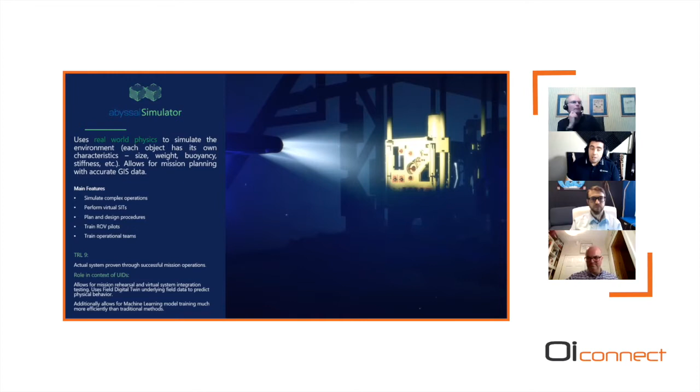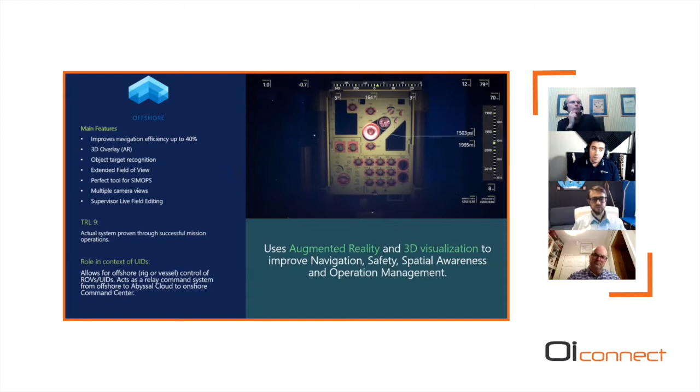The result from a simulation is a plan, and that plan is then executed. The execution is essentially we have a kit that we install in the ROV control room near or on the vessel, or on an unmanned surface vessel equipped with an ROV. What it does is allow better data management locally offshore. If there's a pilot there, we also do augmented reality to help the pilot navigate better in low visibility conditions.

This is an example of that augmented reality, because we have access to that 3D environment and the live telemetry from the ROV, we can do things like this. This is just a couple of pictures on the system in use.

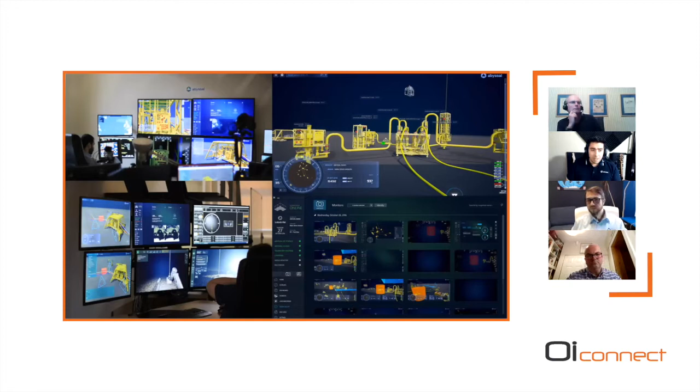Now that while we're performing those operations, those jobs offshore, and because we're sending that information to the cloud, our capability of creating command centers on the fly is very straightforward for us to do. This is an example of what we've done, and Al was also involved in this. We were tasked with the monitoring of an operation where an unmanned surface vessel equipped with an ROV was doing an operation. So essentially what we've done, we've set up a command center in Sunbury in their headquarters for BP. And then we use the cloud to disseminate that information live to Baku and Houston, so that people could see the operation in 3D live.

So, but let's dive into the process and contextualization. The purpose of this presentation is how can we accelerate the analysis of inspection videos by subject matter experts. And this is all done by automatically detecting those subsea entities and anomalies, the exact job that the subject matter experts do.

And this was our motivation. The manual or human analysis is always error prone, obviously time consuming, and you have to parallelize with human resources.

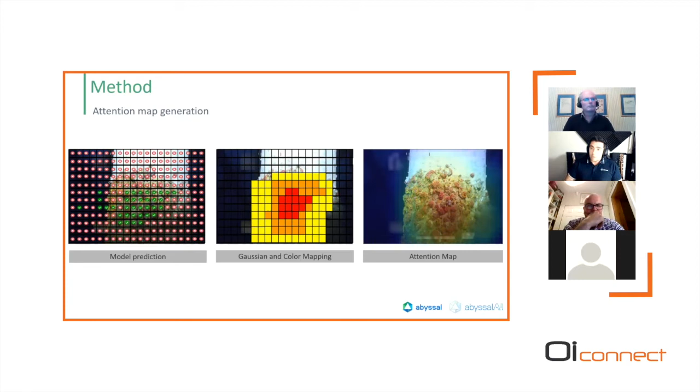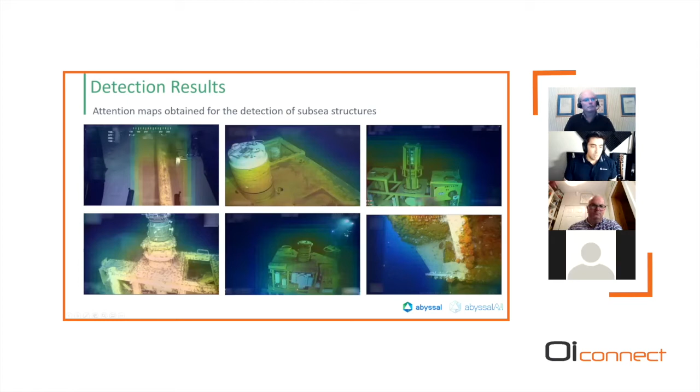Let's look at detection results on this kind of imagery. These are a few of the results from subsea entities to pipelines, marine growth in several different situations, but also to detect other things. It's specifically useful to detect the ROV when we're talking about imagery, because we can remove the manipulator from a model that we're trying not to have something in front of us.

If we want to analyze only the image, we can take out the manipulator in front of the camera. But let's say that we now have a probability cloud. Instead of having a color grading, we can make it binary—either there is or isn't marine growth in that area. We can segment and create segmentation masks, meaning we know in the imagery where that structure is positively or negatively, and this will make sense when we move to use cases.

But the overall result of this weakly supervised deep learning model is that not only is annotation faster—100 times faster to annotate data like this—the actual model itself is also 2 times faster than a traditional deep learning method, which means this could be the difference between not being able to do it in real time and being able to do it in real time.

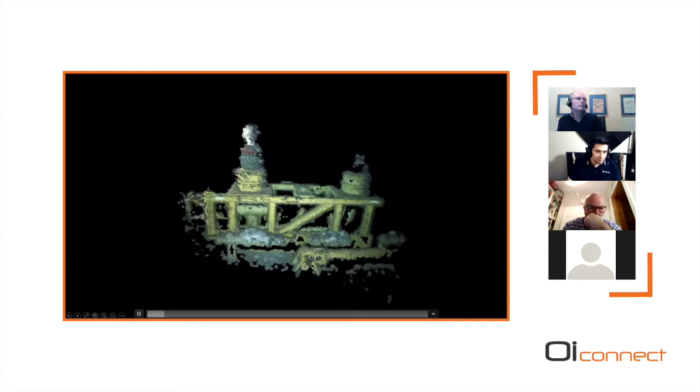What you see on screen is actually 2 different years of the same PLET, but because there was a pipeline walking issue, it moved throughout those years. So these are 2 point clouds, one from each year, of the same PLET head. We were able to achieve an accuracy of half an inch in the volumetric reconstruction, and the result is something like this.

But this is just a result, let's see it in a real use case. This is what we've done for a client, and what we had was only this real footage. What we were able to do with this footage is to volumetrically reconstruct it into a point cloud. So essentially, this is the point cloud from this imagery, and then we compare it with the CAD schematic.

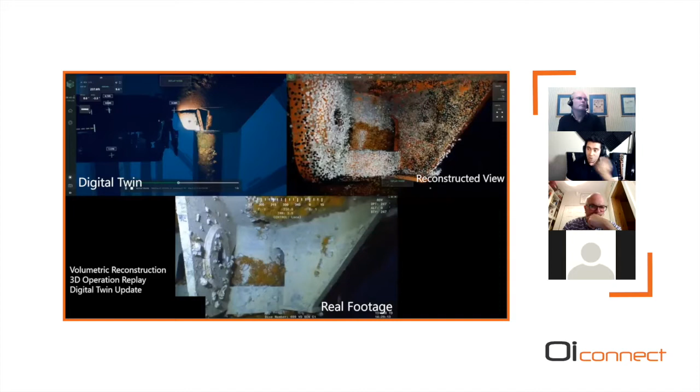The difference between the point cloud and the CAD schematic is actually the marine growth, but now in a volumetric response. So now we automatically can find out the thickness of the marine growth purely based on video and CAD schematics. We were also able to estimate the position of the ROV, essentially reconstructing the operation and movement of the ROV, but also to estimate the camera movement, which is essential to do this.

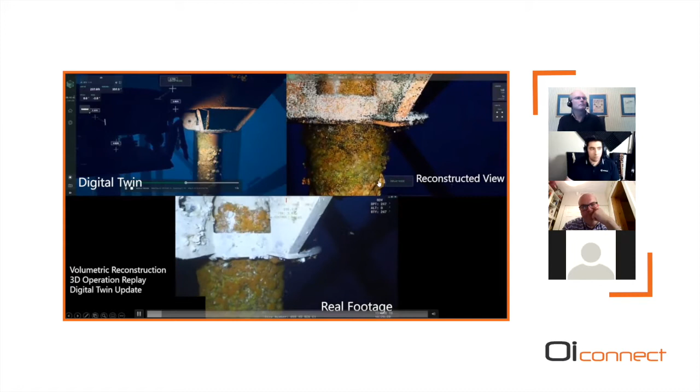The way we do this is in the Abyssal Cloud. If you want to do that to your videos, this is the product that we use.

My last slide is on what we're developing next, and that's Subsea.ai, which is the capability for you as a user to create your own machine learning models based on our techniques. We've developed our own techniques of developing machine learning models, and we allow you to do exactly that with your own data to fix your own specific problems.

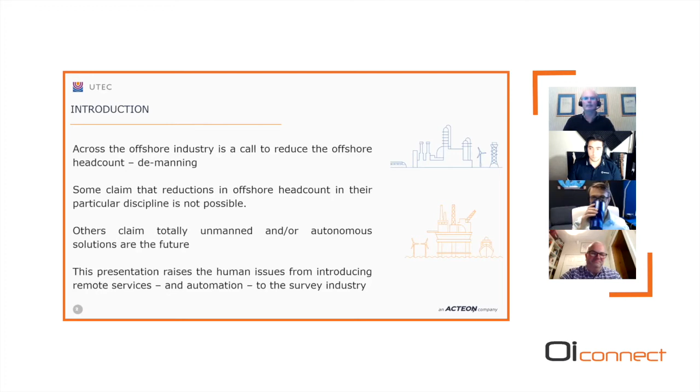And the arguments are obvious: reduced offshore headcount, fewer man movements, you can bring an expert to bear onto many spreads rather than needing an expert on each spread, and all of that's going to reduce costs. So what's not to like? Well, that's what we're going to discuss.

So by removing people from the work site, one of the key things we lose is what I call situational awareness. Now this is peripheral knowledge beyond the sensor displays. It's not about giving the remote surveyor more cameras so they can see what's happening outside. It's the fact that if you move an online surveyor to a remote location, he's no longer in the mess room hearing what's gone on elsewhere or on a previous shift.

So he just misses out on the accidental conversation. That's a big problem with remote services.

Also, if we're taking people, demanning the offshore spreads and putting people in remote control centers, operating automated software, we're dehumanizing the profession. You know, I made some of the best friends of my life working with people offshore, where you're on a big tin can for a couple of months and you get to know people.

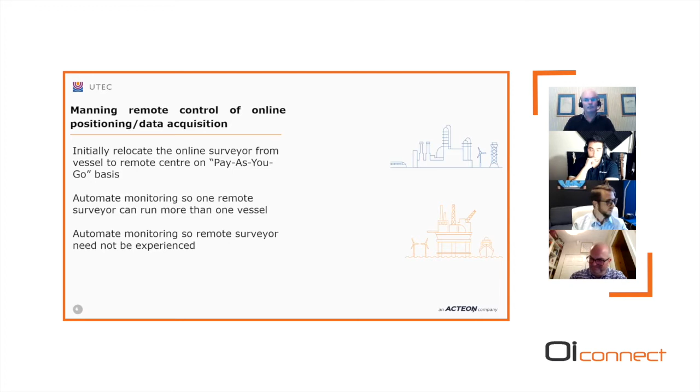Right, so then, never mind the online surveyor, let's look at the role of the experts. Everyone talks about, oh yes, remote services, your team of onshore experts support many jobs. And you go, that's much more efficient than having an expert on each job, and also addresses the skills shortage, where all these experts come from.

You go out on a metrology job and you haven't got the best metrology man because he's busy on another job. So now we can bring the best metrology man to every metrology, right? Because he's sitting onshore.

So what happens to all these other lesser experts that you're no longer needed? What are they going to do? If they're not getting the day's work, then they've got to retrain as something else in the survey industry, or just leave. And then you can apply the same to inspection coordinators.

That one coordinator could supervise multiple inspection engineers. And same with party chief, offshore managers, client reps. Do they need to be on the boat? Can they just be sent all the screens and data so that they can QC and monitor from onshore?

And again, you don't need a remote client rep per vessel. One client rep remotely can QC multiple vessels. So fewer people - you're decreasing the pool of personnel in the industry, which is decreasing the experience and expertise that's available.

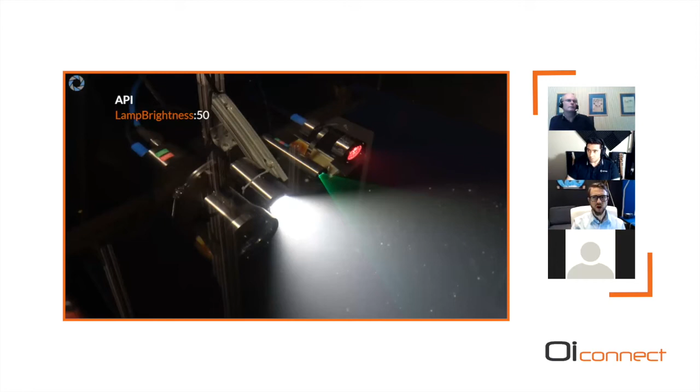SubC cameras can control white LEDs, far red, and other colors of LEDs, as well as different types of lasers. The camera supplies power and strobes the LED in sync with the sensor exposure time, which reduces equipment and interface complexity. Here's their API call for enable strobe, and SubC has a number of plug and play options for lasers.

There are many lens options for different machine vision applications, including line, grid, and parallel points. So a laser brightness of 100 would turn on your laser at 100%.

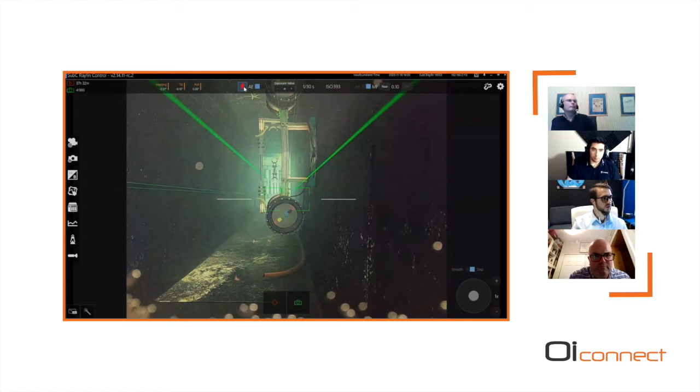Now I'll give a real-time demonstration of a camera with scripting capability. You can see the camera running here. Along the top, we have our heading, tilt, and roll. You can also have a depth sensor integrated, strobe control to turn on and off your strobe, and exposure control.

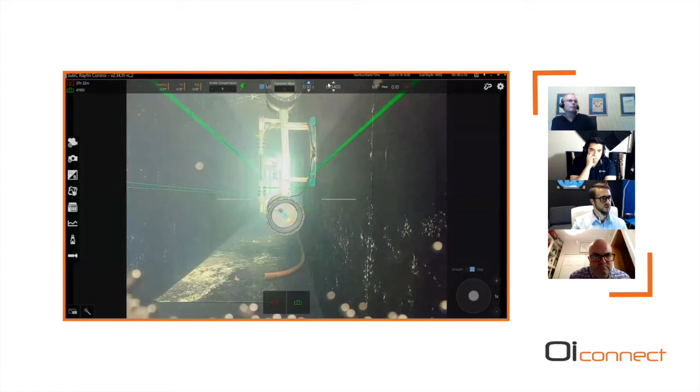So you can change your exposure bias. For auto exposure, you can also set it to manual exposure and adjust your ISO and your shutter speed. You can also control your focus from near to far, and everything can be full auto or full manual.

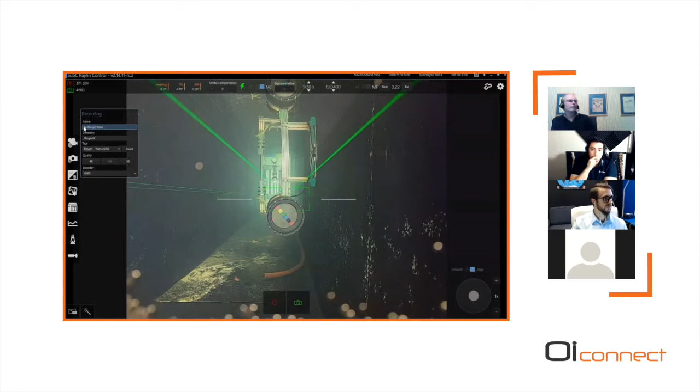Along the left, we've got some recording settings, so you can have different site names. So site 1, for example, and you can have a project name or a folder or directory name, so project 2. We can also insert some tags, just simple tagging structures to make things a little easier. You can get down to milliseconds with tags, and you can also have custom tagging.

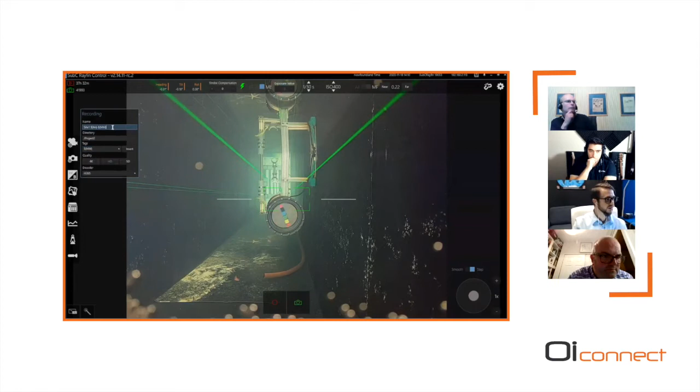Quality can be recorded from 4K to SD, and I'll go 4K, and we can also record H.265, which is a new codec over the last number of years. H.265 is about double the quality for the equivalent bit rate. So if you're recording at 100 megabits per second in 4K or HD with H.265, you'll get better quality.

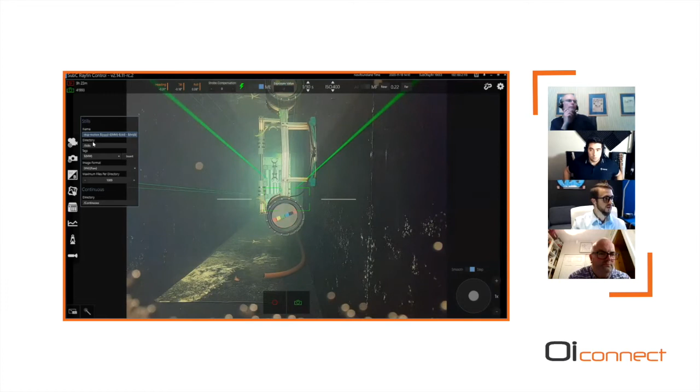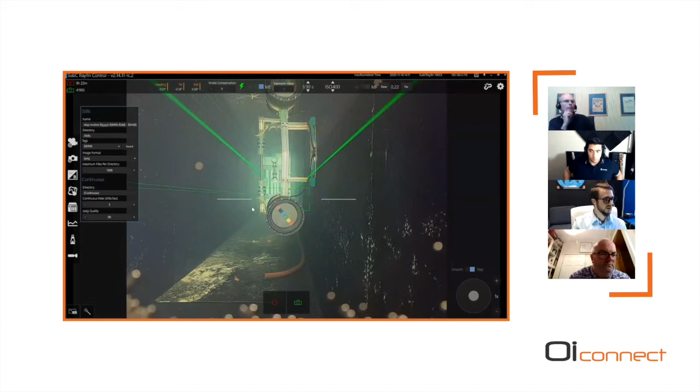Similar with digital stills, we have a folder naming convention. We also have a file naming convention that mirrors the recording. You can change from RAW to JPEG, and you can also take digital stills continuously. So if I set it to 2 Hertz and hold down the button, you can take digital stills rapidly over a wide area and use those digital stills for photogrammetry or other applications.

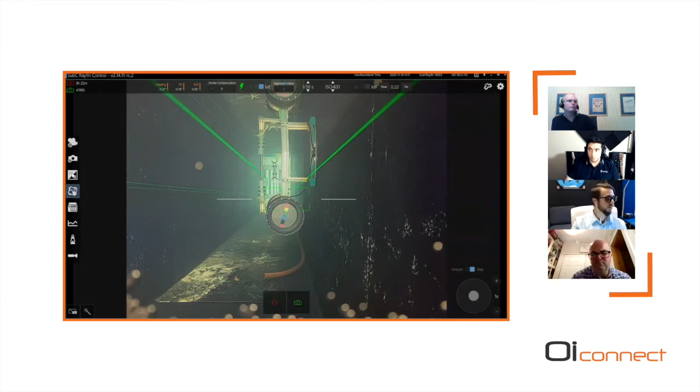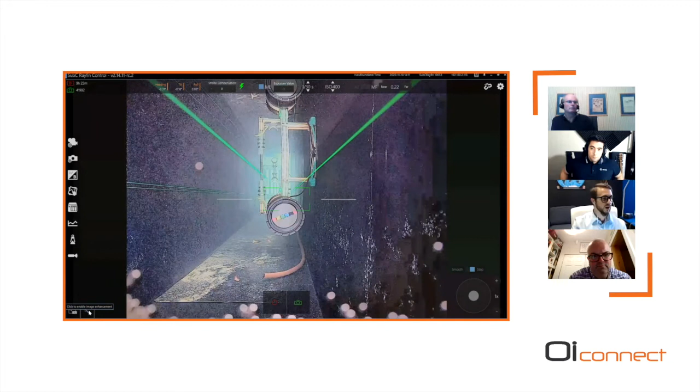We can change your white balance as well, so we can have a shallow water setting. Say if you were in shallow water and there was a lot of green, you could reduce that and adjust it for your environment to get a better image. Similar to that theme, there's an image enhancement built in if you really can't see anything, for really murky environments. This is a tool so that you can at least see something to get the job done.

You can also view our images and data in real time, and other computers and processing systems can access this data over Ethernet from the camera in real time. You can have it on an observatory or an AUV or something with low bandwidth connection for video, so you don't need your live 4K feed back. You can record to the camera or take digital stills, download those images and video in real time, process them, and get very creative with your workflows to improve efficiency.

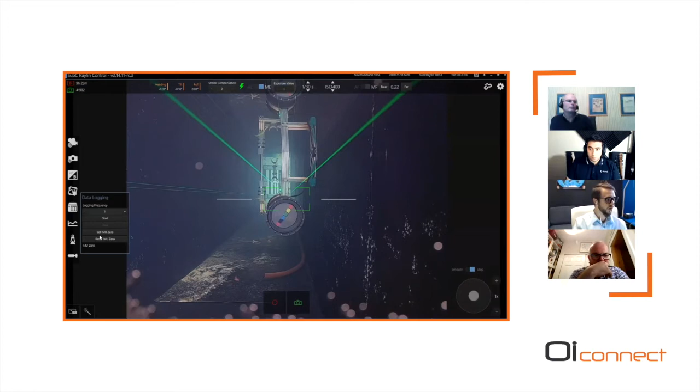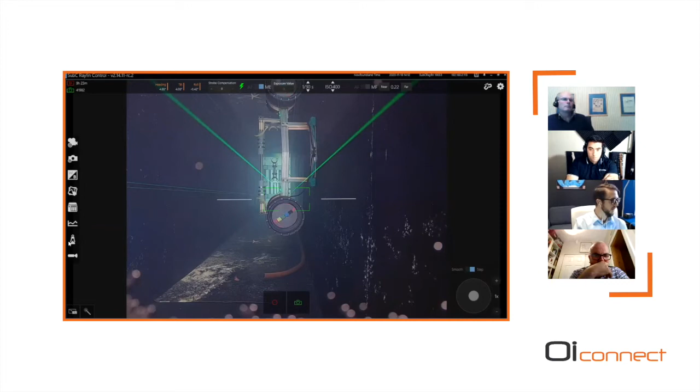NAS storage as well, so you can store to an external NAS on the network, somewhere on board the vessel. And data logging, so it's enabled right now. We can change our logging frequency, in Hertz, and we can start and stop. We can also reset the IMU or set a new zero for the IMU, that's your heading, tilt, and roll. So I'm going to reset it, and you can control your attached lamps and lasers and other devices that you have connected.

On the right-hand side in the advanced settings is where we're going to be focusing, just some quick communication connections, settings for bit rates of the live video.

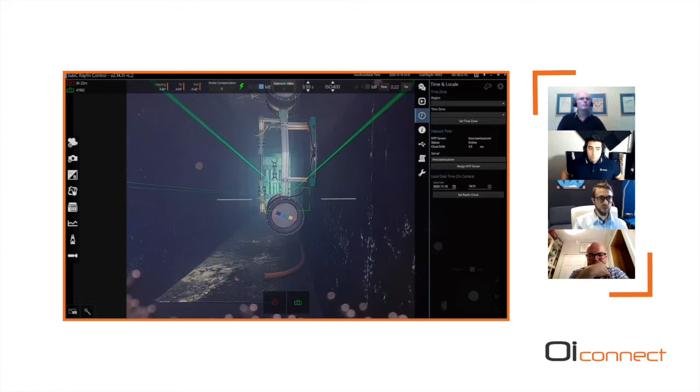Here it's important to understand your time and locale settings. Time is really important for data logging. So you've got your region, your time zone. It defaults to UTC, and you can also have network time, which would sync to an online cloud NTP server, one on board a vessel, or one even in the system, say in the case of an AUV. And you've got a local date and time, which the camera will default to if you lose your network time connection.

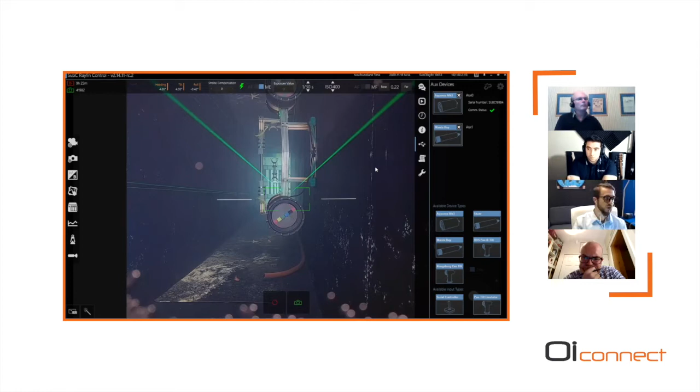Some diagnostic information, and this is where you set up your plug and play auxiliary devices. So you can have a number of devices here. This is what we currently support, and we can add more over time. Right now we have an Aquorea Mk3 and a Manta Ray parallel laser connected. And as you add devices, the controls are accessible through the API and through the user interface here.

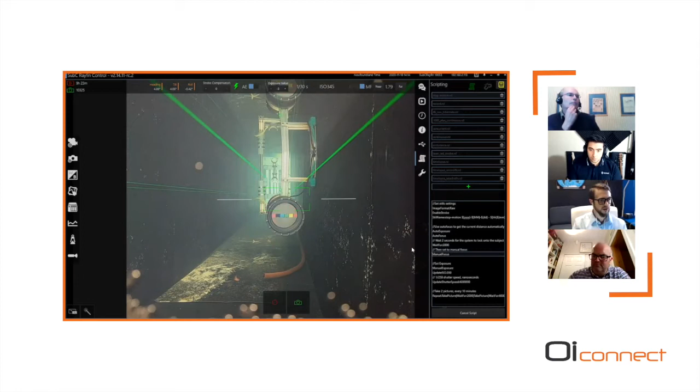This is the point of having this demo right now, scripting. So I'm going to run this script. And what this will do is set up a stop motion function, changing it to raw format images, turning on auto exposure, auto focus. Should wait for 2 seconds now. And it's going to turn on manual focus to lock it in, manual exposure to set the shutter speed and the ISO. And what this function will do is repeat: take a picture, wait for 2 seconds, take another picture, and then wait another 10 minutes.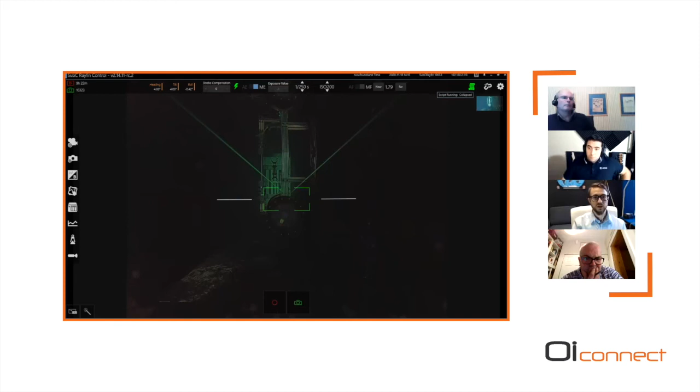So that function will continue to run autonomously now. You can see a script is running through the user interface. You do not need to use the user interface with our cameras, that's something to note. We have customers that are using Python scripts and other scripts to use our API, sending commands to the camera, using the camera as a sensor as part of a larger system. If you would like to cancel your script, you can just turn it off this way, and that icon disappears.

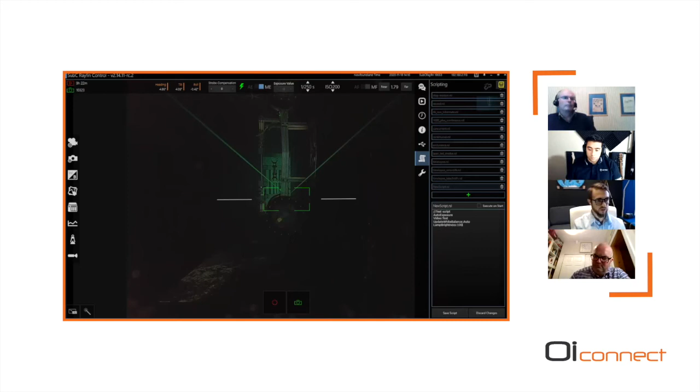So now I'll write a quick demonstration script, and we can add some comments, some notes, and I'll set it to auto exposure, video name test, and update white balance to auto, and lamp brightness 100, and start recording. And I can also have this script execute on start, so what that does is when the camera boots up, it will automatically execute that script on boot up every time the camera turns on.

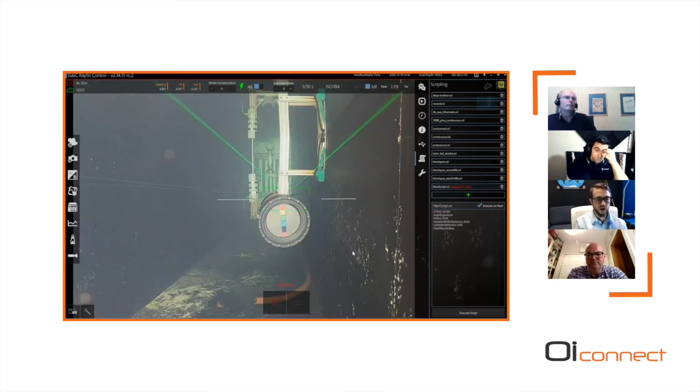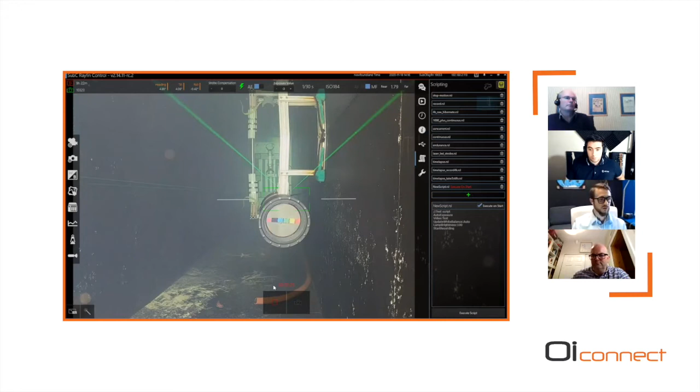And there we go. So what this means for researchers and for people in the offshore and on any underwater application where you need imaging is a lot of this stuff has to be usually designed or figured out by the researcher or by the industry person, by the professional. We are working hard to try and automate things and try to make it really easy. So that's the camera demonstration. And we go back to the presentation now.

So what are the benefits of scripting? It's reduced autonomous system complexity and cost. Scripting allows the camera to operate independently without requiring an additional computer or person to send commands on a schedule. For example, in an observatory, there would be a dedicated server running Python scripts or other scripts to directly control the camera node and the other sensor nodes. Normally, underwater imaging solutions would require a separate data logger. In our case, the camera is a NMEA data logger, so that reduces equipment. The camera has 512 gigabytes of solid state storage and records weeks of NMEA formatted data, days of video, and tens of thousands of images.

Each additional piece of underwater equipment would require its own pressure housing and cable. So by reducing components such as data loggers and controlling systems, you reduce the cost and you increase the reliability. And when a system also has less components, you would also expect it to consume less power from battery systems.

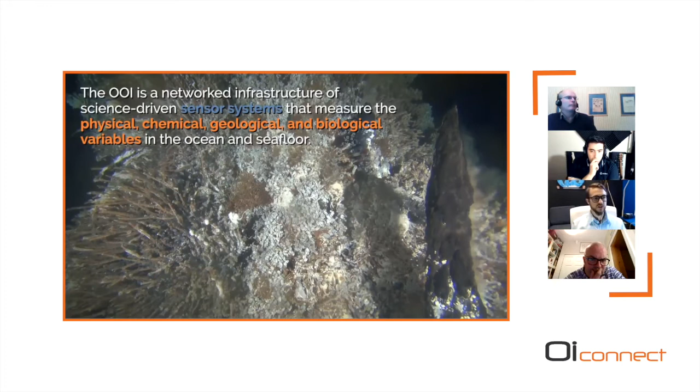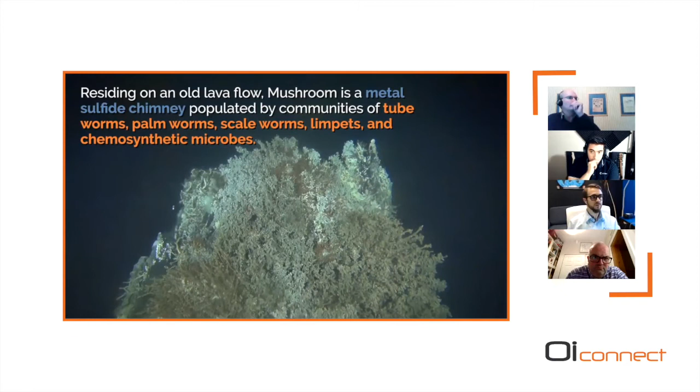So I'm just going to show you a few real-world examples. SubC has been working with the OOI, Ocean Observatories Initiative in Washington State for a long time now. So this is a video, a video at the axial seamount. It's several hundred kilometers off of Washington State. They've been using our cameras for a long-term time-lapse of images and video of a hydrothermal vent. The OOI is a very large network infrastructure of hundreds of different sensors at different sensor nodes. They're all connected with a large fiber optic network back to a giant server station at the University of Washington's Applied Physics Laboratory. This particular hydrothermal vent has been studied since 2014 with SubC cameras.

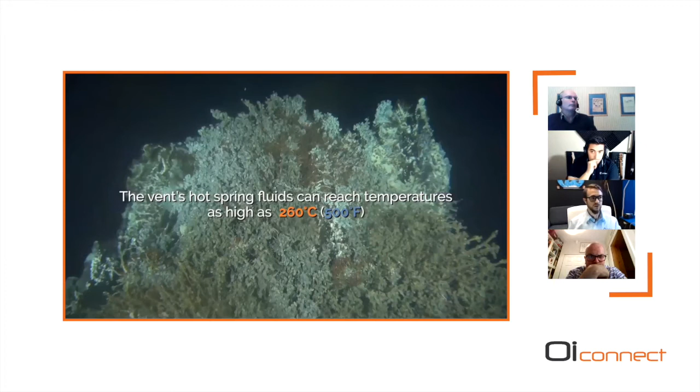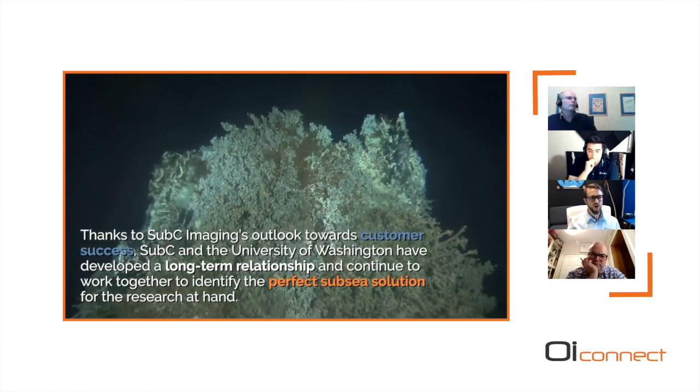It's called the mushroom, and the hot spring fluids can reach very high temperatures. The creatures that reside there, living on this structure, shift and change over time. Different populations go up and down as time goes forward, and the vent structure itself changes shape as well. So it's a very interesting study over a very long duration. If you'd like to know more about that, you can see more on our site or on the OOI site.

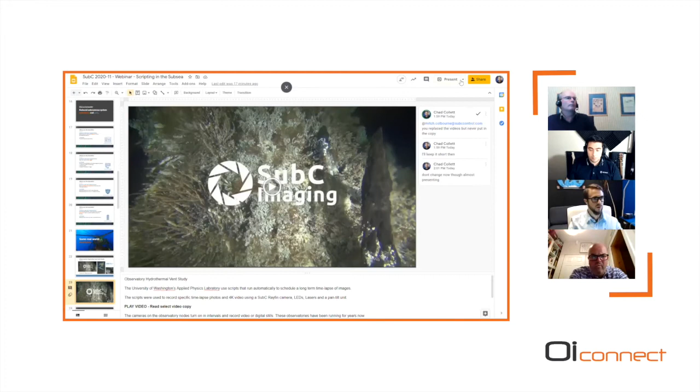This option was developed with the Ocean Observatory Initiative on the West Coast of the United States. It turns the camera into an Ethernet multiplexer for 4 devices with a resettable circuit breaker and fault detection. This is another piece of automation. Essentially, it reduced the need for a separate Ethernet switch with relays and fault detection, and we moved everything into the camera so it became the hub, automatically detecting faults from under voltage, over voltage, or short circuit from other equipment. We had a pan tilt, 2 LEDs, and a set of parallel lasers all running from the camera, with the camera as the hub. Everything was accessible through the API for scripting.

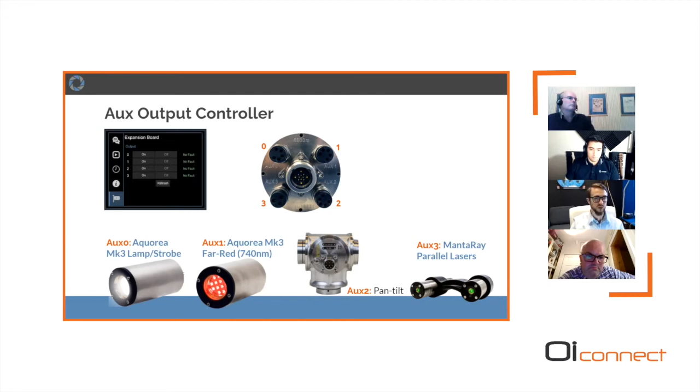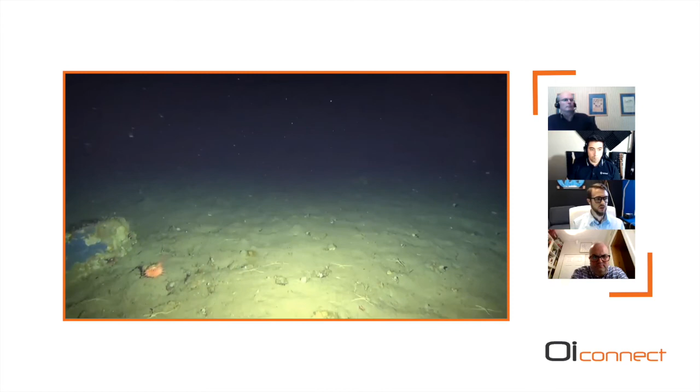The Marine Institute in Newfoundland has been using subsea cameras with scripting and intervalometer for many scientific studies. Their system runs on batteries and is attached to a lift wire, deployed between 100 meters to 3,000 meters, and it's all autonomous. The cameras are programmed before deployment on the deck of the ships. The operator doesn't have a real-time view of the footage, and it goes along and hits rocks and does other things, but it's quite robust because it's a heavy steel frame running on batteries. The system is used in fishery studies to add data for stock assessments. In this set of clips, the Marine Institute was conducting a turbot fish study. The same deployment methods have also been used to study Greenland sharks and other species.

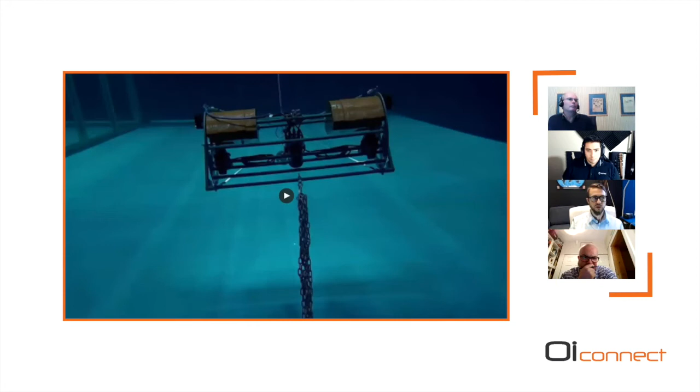Here you can see SubC's new towed camera solution being tested in the world's largest flume tank at the Marine Institute in Newfoundland. You can see a digital still script running as the LED strobes in sync with the Rayfin camera. You'll notice the green dots on the bottom of the tank as the MantaRay parallel lasers are activated. The dots are calibrated at 10 centimeter spacing and can be used for scale and range. With this system, a live view is available, so scripting is not 100% necessary, but it's definitely useful for automation. For example, if you wanted the system to automatically start recording at a certain depth, you could do that, and that takes some of the guesswork out of it.

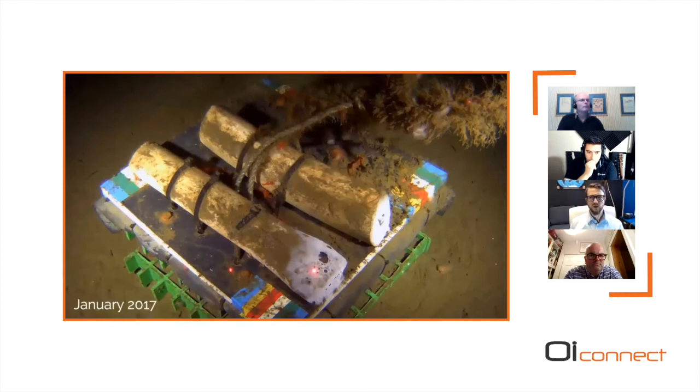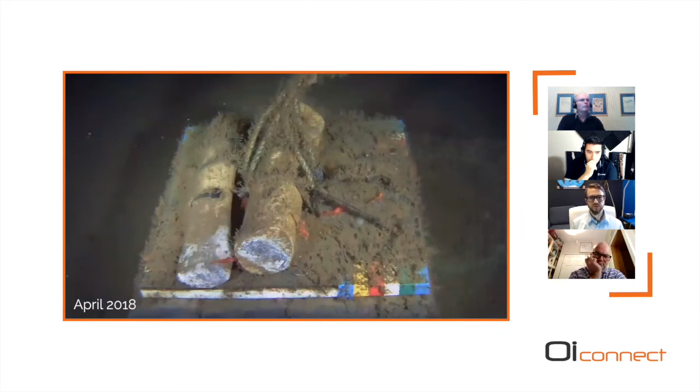University of Victoria has been using SubC's observatory solution for their underwater study in Barkley Canyon since 2014. In May 2014, 3 humpback whale rib sections, 1 block of Douglas fir, and a block of authigenic carbonate were placed at a depth of 890 meters inside Barkley Canyon at a site on Ocean Networks Canada's NEPTUNE Subsea Cabled Observatory. The purpose of this experiment is to monitor the changes triggered by the implantation of various organic and inorganic substrates, and to monitor how benthic creatures utilize the sparse food resources available in deep sea settings. On a schedule of every 2 hours, the autonomous subsea cameras and LEDs pan to 3 different substrates, holding position for 1 minute each, capturing 5-minute videos over 6 years. The study is still continuing today. It's a small hotbed of activity for creatures because the abyssal plain is pretty sparse, so this site attracts species from a wide area.

In the webinar theme of remote operation and the new normal, we thought it would be relevant to give a quick overview of the new SubC real-time streaming service as well. It enables remote operation of assets, kind of counter to our previous example - we're enabling the service, we don't decide whether you want to use it. This service enables remote operation of assets and allows decision makers to access live video from anywhere in the world. Here's how it works: the streaming solution sends offshore video sources to a cloud server. From the cloud server, your video feeds are sent to your secure SubC streaming account. From anywhere in the world, your account manager can log in to set up live video presentations.

You can then send your presentation secure access code via email. Because security is paramount, you can send that secure access code to your clients and coworkers who need to be in on it.